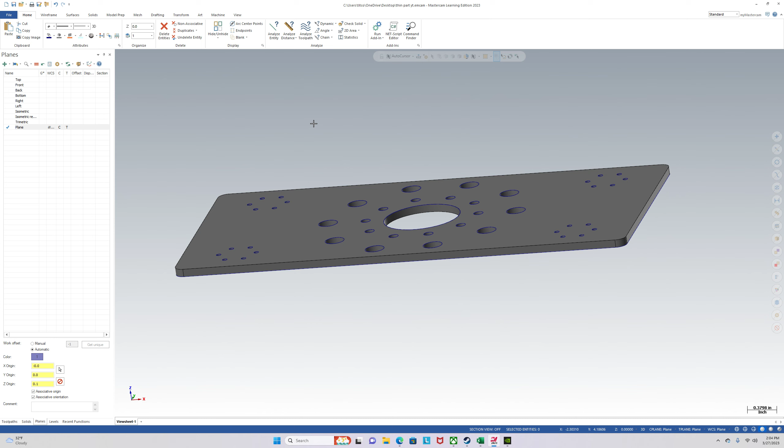So first, I'll show you guys how thin it is. It's 3 inches by 6 by 100 thou. So we're going to pretend this is like a piece of titanium and it's been to the wire EDM department and all we have is like a shim. So the holes aren't in here and we need to put the holes in. So it's a little too thin to grab in the jaws, so what we want to do is just make a fixture for it.

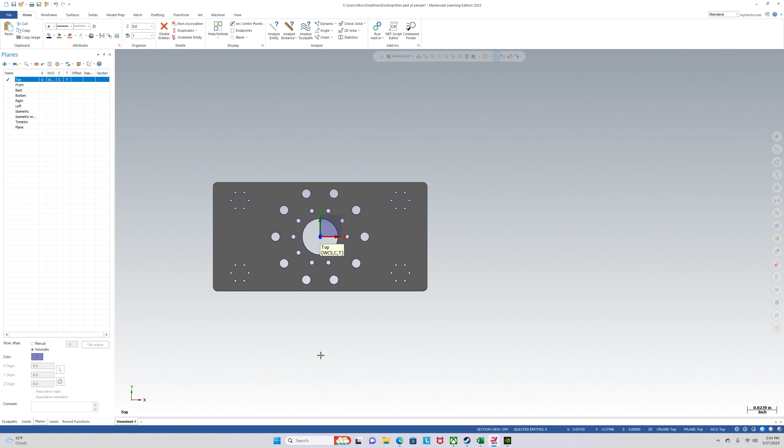So first we go to the plane. It's on the bottom. Let's see if it's there. Okay, perfect. First we'll just level this part, then we'll have another one - fixture.

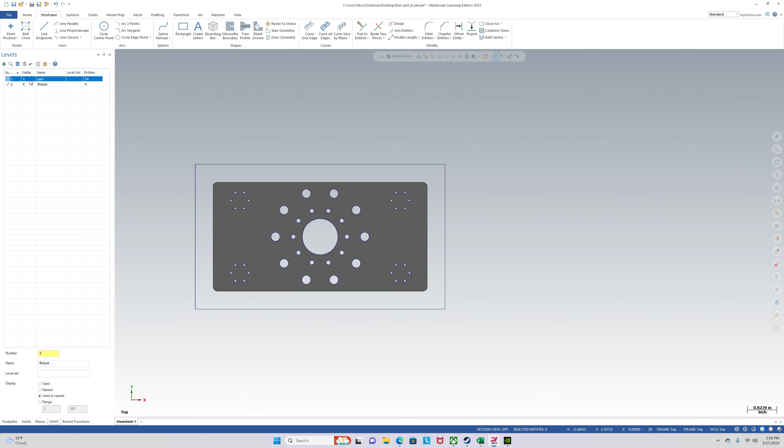Okay, so just go to the fixture level and we'll make a rectangle obviously bigger than the part. So let's go 4 by 7. Now let's turn the part back on. I'm thinking a little bit bigger. Let's go back to fixture.

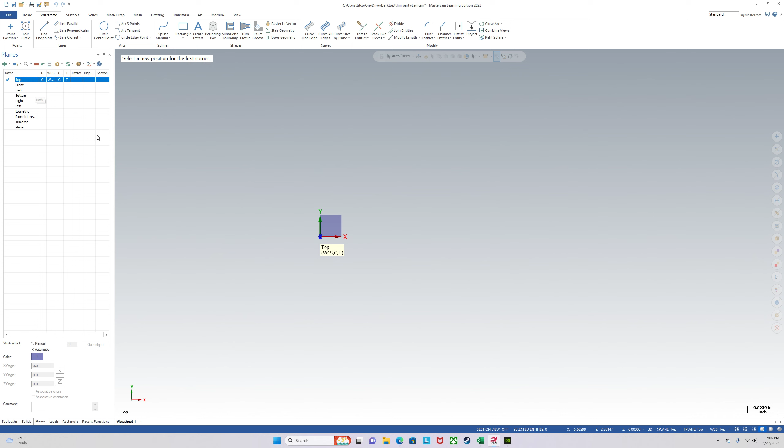Delete that. Center. Okay, so let's go 4.5 by 7.5.

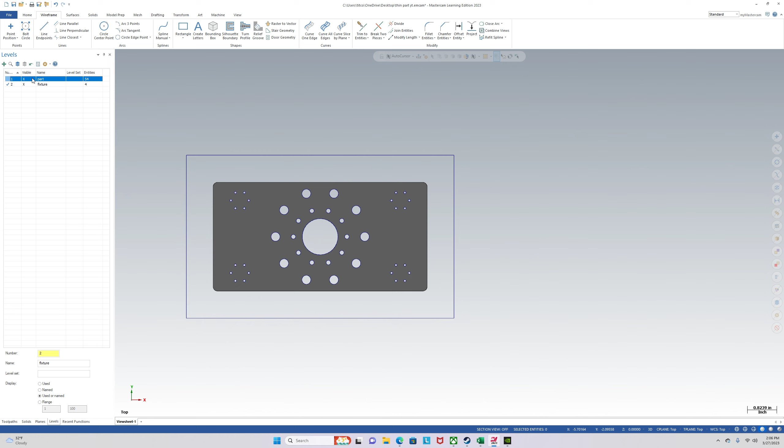And this is just the outline of the fixture. The fixture we plan on holding in a vice jaw, so we don't have to make any holes to bolt it to the table. It'll be a little bit easier. So, fixture.

Start by extruding it. Just select that wire. We'll go down 1.25. Okay.

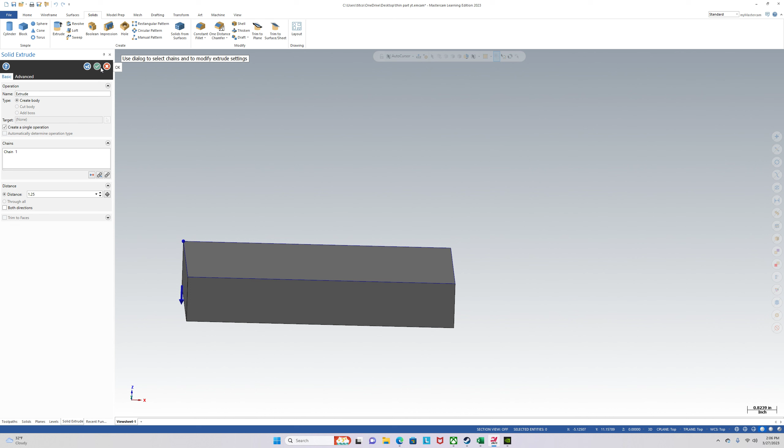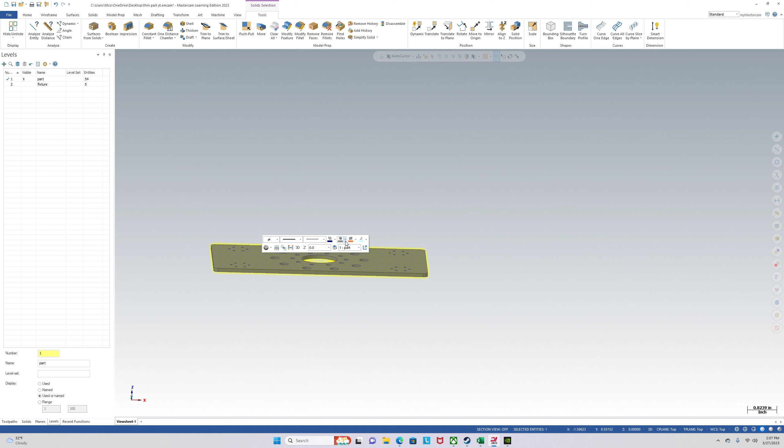Change the color of the fixture to yellow, and then we'll change the color of the part to that color right there, light blue. Okay.

It's starting to look like something. But what we have to do here is go to the top plane, select this part, and be on the fixture level. What we're going to do is find silhouette boundary, so it's going to create a boundary around this part, and that should be on level 2.

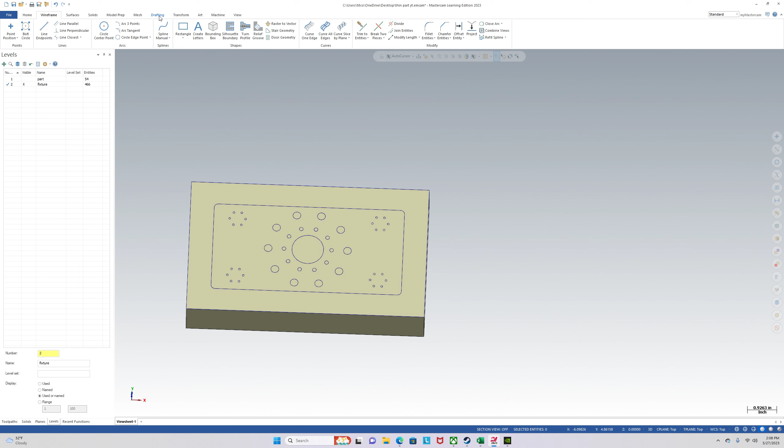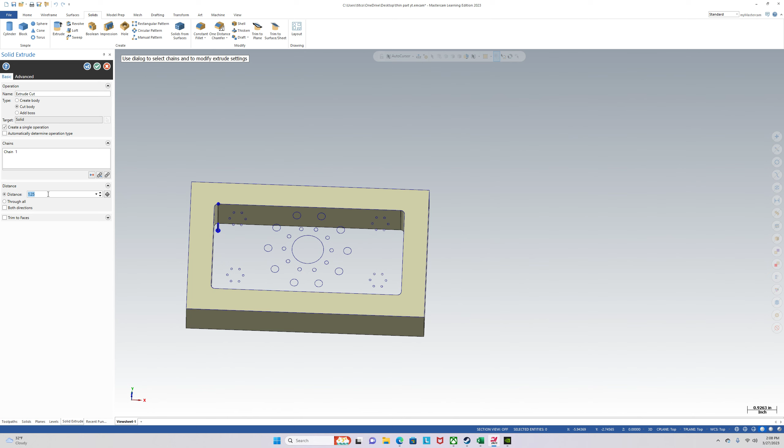So we can delete all this extra stuff - leave it for now, actually. We'll just go to solids, extrude, select that chain, and we're going to cut body. And so that part is 100 thou thick, right? So let's say we want the option to put a chamfer around the thing, so we can just go 60 thou. Perfect.

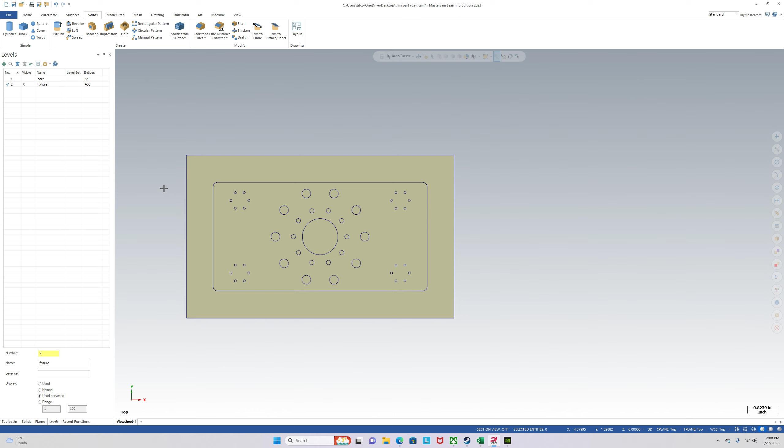And now I'm just going to delete all this wireframe we don't want. So let's activate our part.

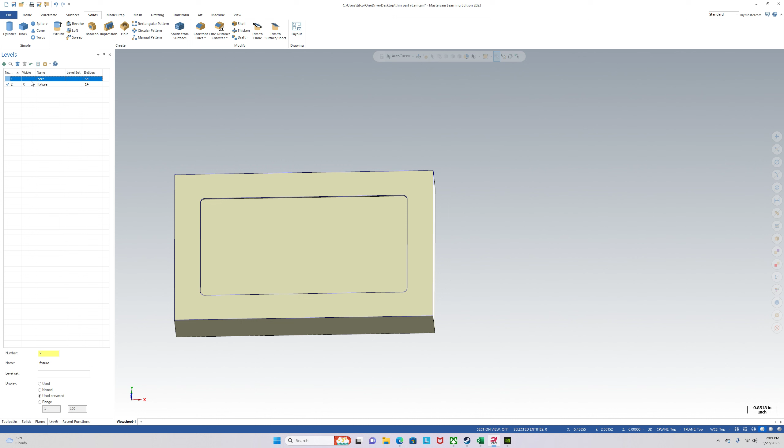And what we need next is - so it's going to sit in there like a slip fit, or like a big slip fit, so plus or minus a thou. So what we'll do is machine this profile and comp our tool a couple tenths at a time until our parts all start fitting in there. Say we have like five parts, all the same - we want to make sure all 5 of them fit in there.

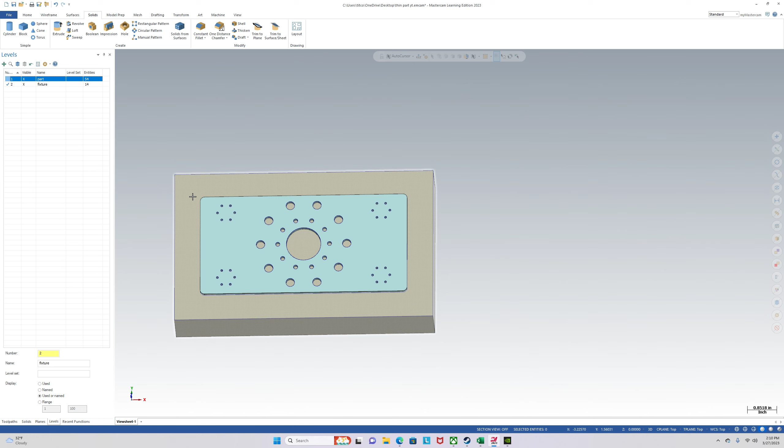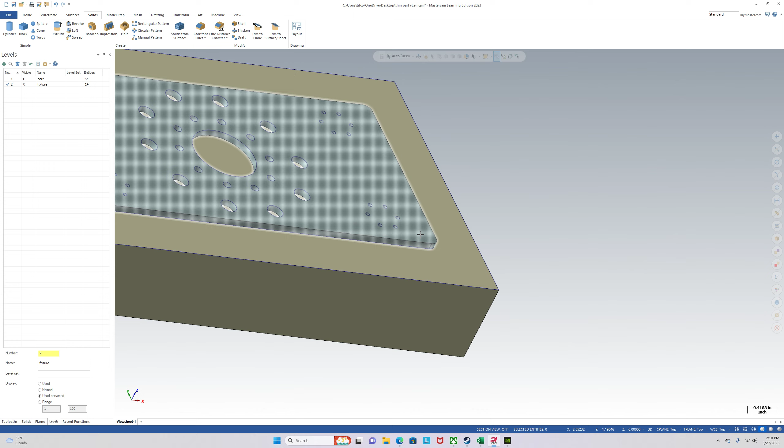And after that, what we want to do is add quarter-inch holes around the pocket, and basically that's going to be the size for small aluminum clamps. The clamps just use a quarter-inch screw into the fixture, and then it has another quarter-inch sticking out the back. This is kind of like a common little machinist clamp, and you can clamp one side of it down into the part. So we'll add those real quick. You can use whatever clamping system you want, but aluminum clamps have worked really well for me.

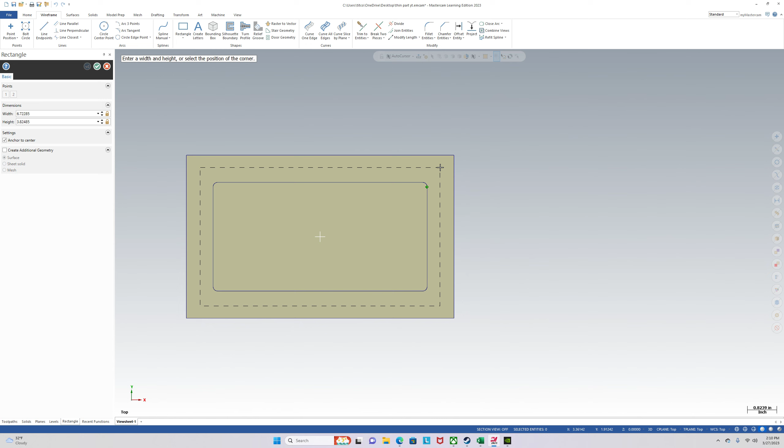Fixture. And we'll try this to start. We'll go 6.75 by 3.75. Okay. 6.75 tab 3.75, and 0.25, enter. Hit the lock button.

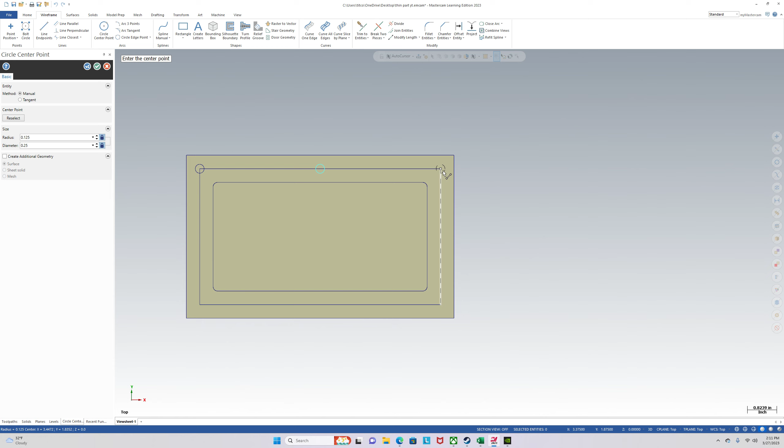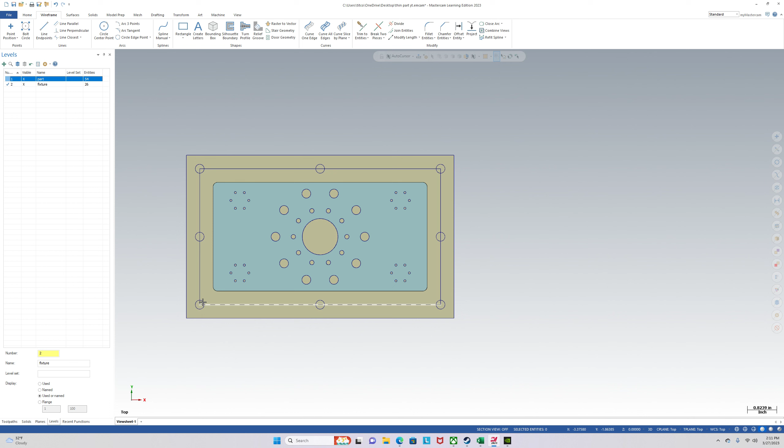So that looks pretty good. We can clamp right here, right? Clamp right here. Clamp right here. So imagine just like a rectangle, the center of it right here, and then it extending onto the part. And then you can clamp down on this side, and there'll be a jack on the opposite side over here. So that all looks good.

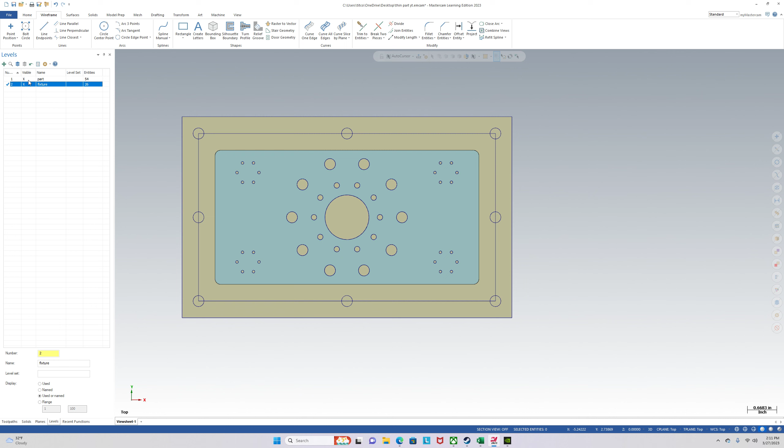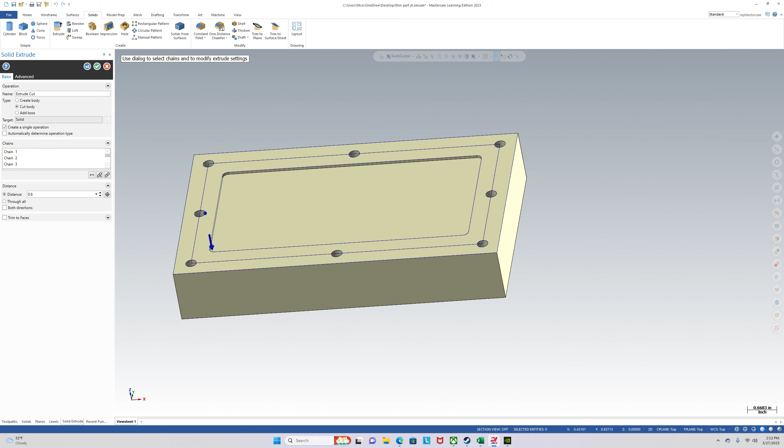Back to fixture. Just extrude these holes down, make it look official. To cut body, we'll go down 2 diameters down, plus a little extra, 0.6. Perfect.

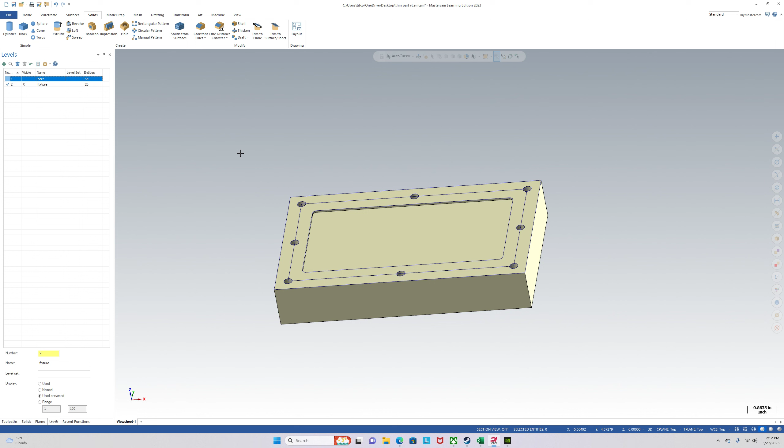Now what we want to do as finishing touches is move the fixture into position so it'll look how it looks on the machine. So we just need to move the fixture up 60 thou. Translate. Go - that looks like the correct direction, but let's go 0.06. And we're going to do move, not copy. So, clear colors.

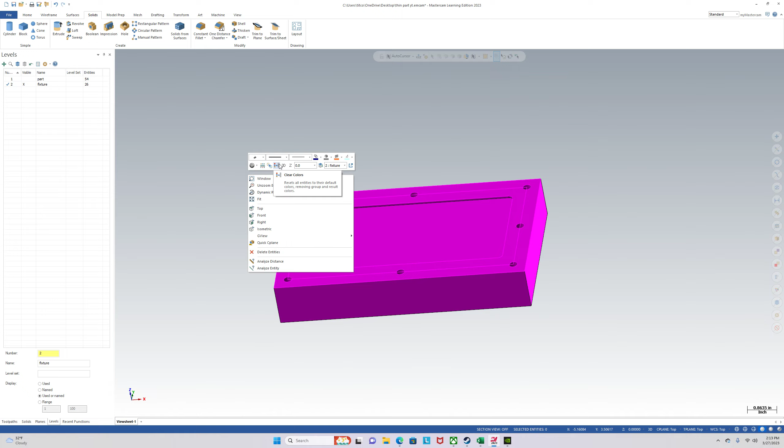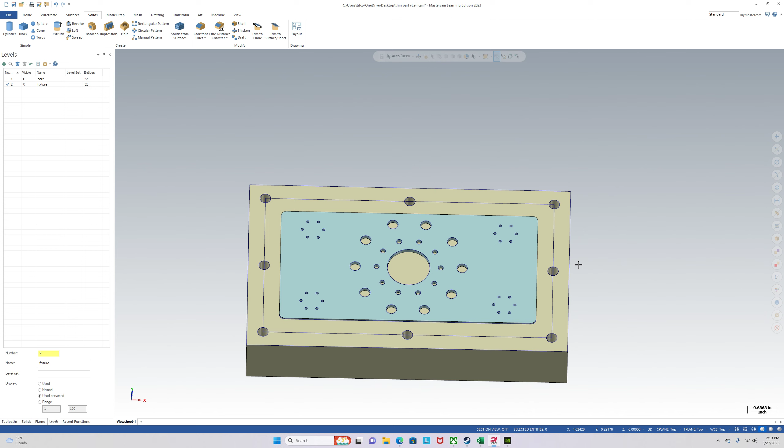As you can see, we have a nice pocketed fixture for our little slabs we'll be putting these holes in. And then we have plenty of quarter-inch holes so we can add and remove clamps as needed throughout the process. And all you have to do to touch this part off is just touch Z, because let's say we set the center of the block as X and Y. This part, if it's a slip fit, can only be off X and Y by like 5 tenths and 5 tenths. So you're going to hit hole positions of like 1 or 2 thou right off the bat. And all you have to do is probe the top of this part and you're ready to go.

So this is it for this video. In the next video, I'm going to create a stock model for this part right here, so it's going to look just like a shim. And then we'll actually machine this part so you guys can see how that's all done.